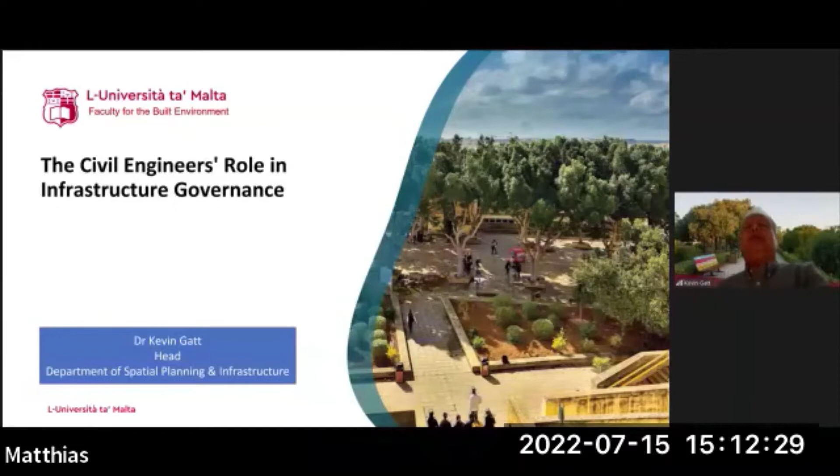I say this simply because the motivation or the inspiration which has underpinned this presentation comes from my pro bono role as a member of the qualifications panel of the Chartered Institute of Water and Environmental Management of the UK, which awards chartered status to professionals wishing to exercise the engineering profession.

One of the things that struck me most is to what extent have we not considered the societal impact of the engineer. Because if we look at the learning outcomes of the AHEP, which governs what an individual should have in order to achieve charter status, one particular section is precisely the engineer and society. It says that engineering activity can have a significant societal impact.

And on this, I don't think we should have any doubt. Engineers must operate in a responsible and ethical manner, recognizing the importance of diversity, and help ensure that the benefits of innovation and progress are shared equitably, and do not compromise the natural environment or deplete natural resources to the detriment of future generations.

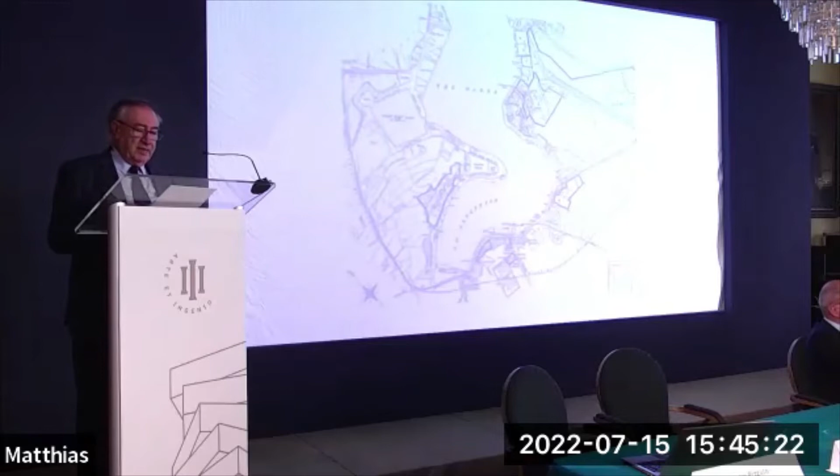Maritime developments in Malta have been evident throughout history, ever since the Roman harbor at Marsa. The Romans engineered a seamless infrastructure below and around the Jesuits' Hill, including berths and warehouses. The Knights of St. John, in turn, developed ingenious maritime logistics and galley facilities, mainly in the south side of the Grand Harbor.

Later came the British civil engineers, who, together with leading Maltese representatives, had a great vision. Together, they developed a new commercial port at Marsa and transformed the French Creek into a world-class naval base.

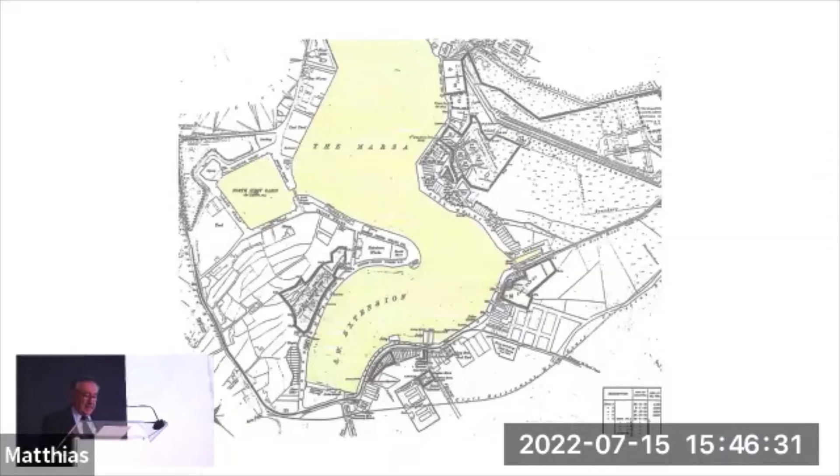Their technical skills, their analytical studies of the Maltese waters, their geotechnical evaluation at seabed level, their construction logistics and plant, and their distinction between planning the commercial port as distinct from the naval engineering base were fundamental in giving the Maltese harbors stature and dedicated usage.

Following independence from the British, the 50 years that followed saw Malta consolidate its harbors by following their original British zonal allocation. However, these developments became peppered with yacht marinas springing up here and there according to commercial convenience.

It was during these last 50 years that one has to recognize the successful development of the Marsaxlokk transshipment freeport, spot on where Lord Strickland had envisaged it in the 1930s. The freeport has brought sustainable economic activity of international standing.

One thing is comforting throughout history. Maltese artisans, civil engineers, and technicians work together with their foreign counterparts to produce sound maritime infrastructure. Thus, the challenge beckons the Maltese civil engineers to continue to discharge their future maritime profession with diligence and creativity.

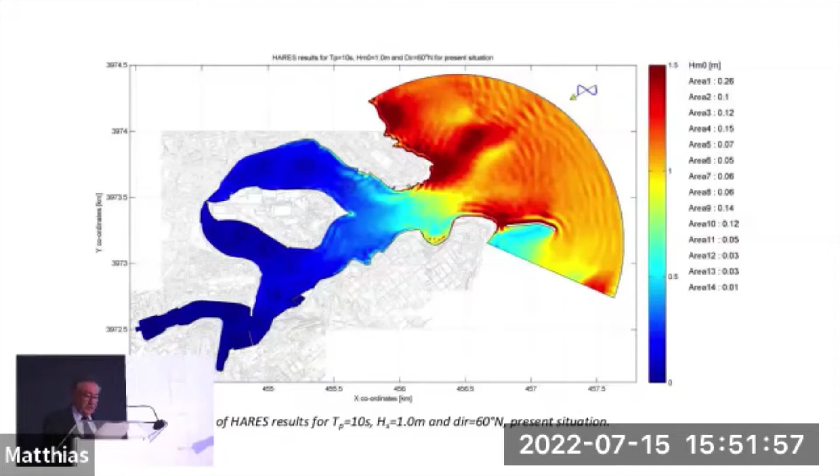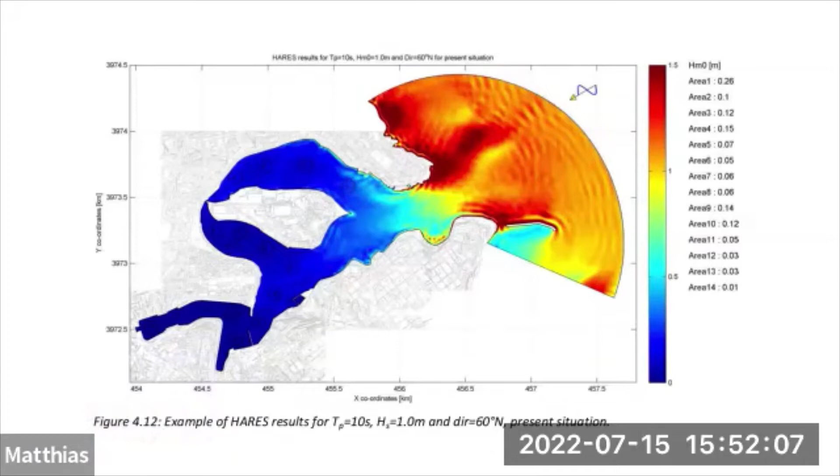Another major issue that the maritime engineer will be addressing in the future is nature itself. History has shown that whatever is man-made has to be respectful of nature. The builders of the Marsa Roman port 2,000 years ago seemed oblivious to the siltation and flooding in low-lying marshlands. Archaeological research has given light to what was justly attributed to distant history. How will the future maritime civil engineer plan his design criteria so as to ensure durability of the maritime infrastructure?

Luckily, science and technology today has built up a marine wave hindcast that civil engineers need to be conversant with when planning and designing future development. Nature is being monitored because of climate change, and extrapolation of records assist the civil engineer in setting long-term design criteria for marine structures. In fact, design offshore wave height from hindcast data gathered in the last 50 years and reconciled with more recent satellite data show surface wave heights varying from 6 to 8 meters, depending on the direction of the storm. Combined wind wave data show gust recordings of 40 meters per second for a duration up to 10 seconds, which then leads us to prediction of rise in sea level due to climate change.

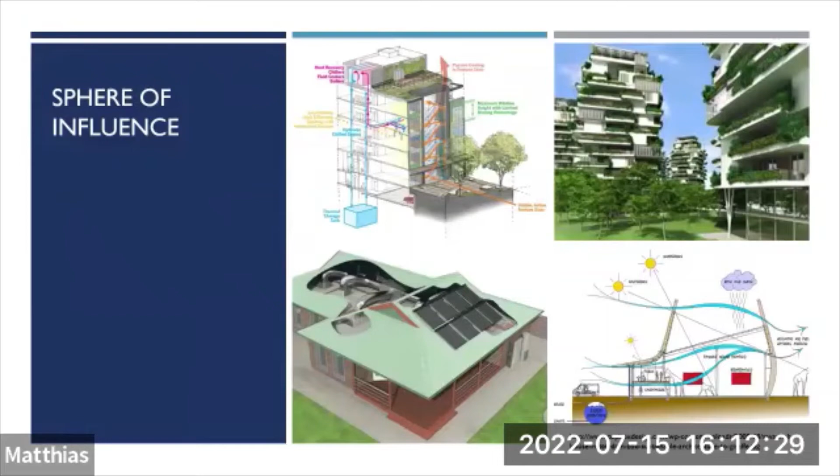Our spheres of influence, how do we make those changes? We all know what we need to do. We need to rethink our strategic land use. Malta, being an island limited in space and highly developed, land use is essential. Efficiency of space is essential. What we build, where we build it, is of the utmost importance.

Passive systems and water harvesting. Water, in order to fight against desertification, is very important. When we do have these extreme storms, we need to collect as much water as we can so we can reuse it, instead of, from the high developments we have, allowing the little water we get to run into wastewater from the roads and whatnot.

Concepts and solutions can fall into two categories: tweaks and innovation. Tweaks: adding insulation, low flow toilets, switching to energy saving lights. Innovation: rethinking the way we design landscapes, instead of just making more efficient equipment or vehicles. We need to rethink what we do, and we need to do it well again.

These concepts have the potential to relieve environmental concerns and improve our lives, and they carry an architectural bonus: more interesting and creative design opportunities.

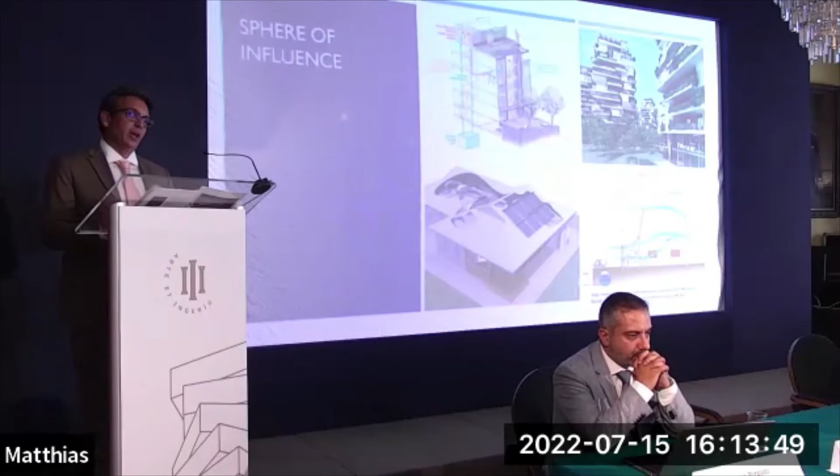I'd like to start off by going through several projects that we're doing at the ministry in Gozo. I'm starting off with the smaller projects, a group of 3 projects that I'd like to demonstrate that there's an opportunity in every corner, in every node, that can make our environment a better, more sustainable place.

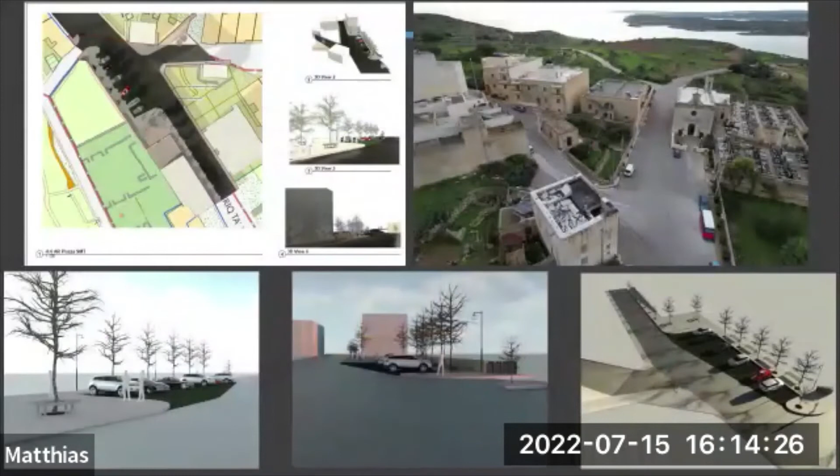The first one is in Qala, Gozo. It's a very heavily trafficked area that leads to one of the most popular beaches in Gozo. Currently, as you can see in the photo farthest from me, it's a traffic area in front of a church that provides no organization whatsoever. It provides some parking, but there's no defined spaces where you can park.

One of the proposals we have is by simply reorganizing so that the vehicular traffic flows know where they need to go, and by the leftover space, we provide grass paving that can filter water into reservoirs, and also in doing so, organize the parking spaces and create a small little piazza in front of the church, which is to be restored in the very near future.

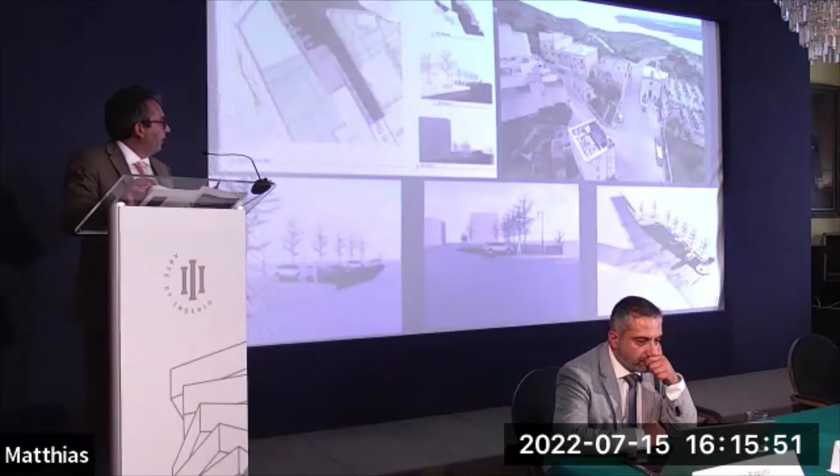This area has the potential to catch water from various elevated spaces, which otherwise would rush into the surrounding areas. By catching this water, we can reuse it in our fields and recycle it for the vegetation to bring up the area around the church.

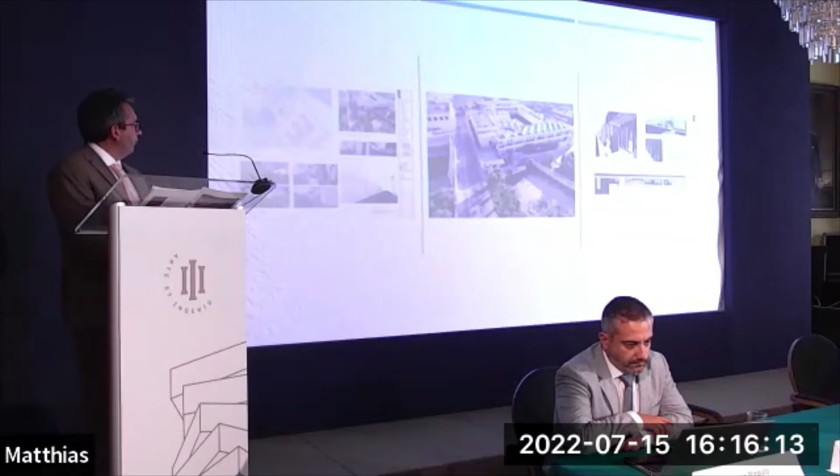Another urban greening project, this time in Ghajnsielem. This is in front of the school of Ghajnsielem, and it is in the very near future to be awarded funding by Ambjent Malta. It received very good marks.

It's a small project. We're removing the cables from overhead, putting them under the road. Most importantly, we're taking down what is now a barrier wall which acts as the entrance to the school, creating an unusable space in front of it. So our project proposes to take down this wall and create a green urban space.

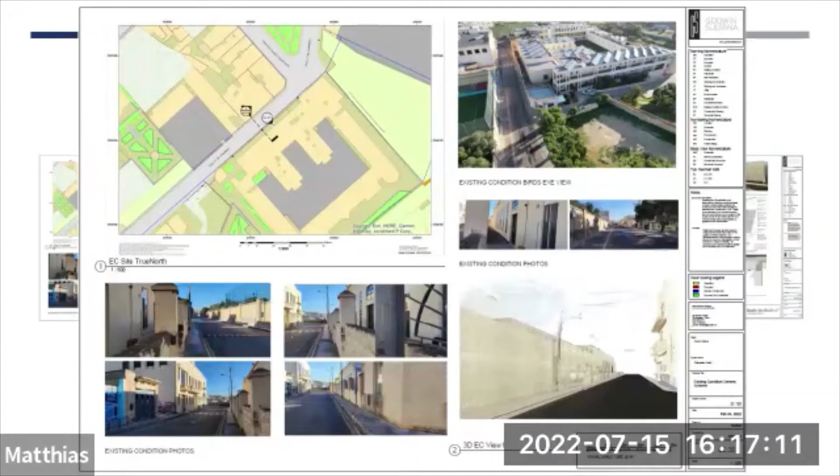Again, we have a reservoir nearby that we can use. We're providing canopies, a green canopy to shelter not only parents who are picking up or dropping off their kids at school, but also providing vegetation on the canopy. Small little acts that can be done that are vital in creating a better environment.

You can see the corridor, which is bland. This is also the entrance to the village of Ghajnsielem, already a very interesting green corridor before you enter this space. Once you enter the corridor of the school, it gets a bit dry and drab with unusable space.

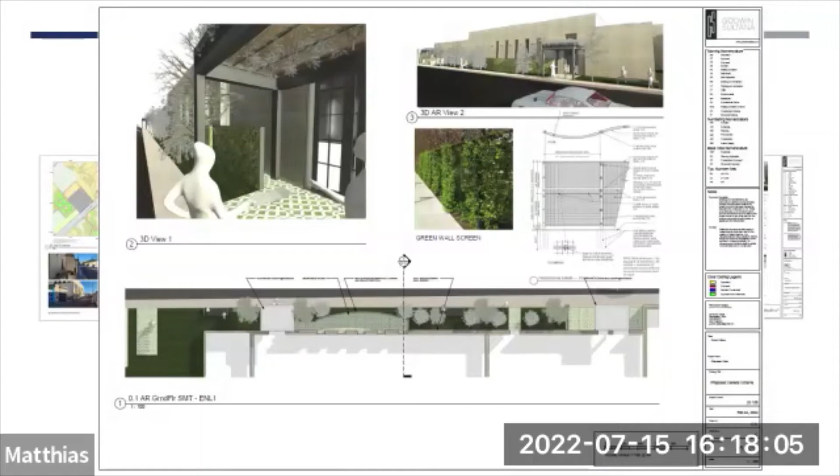Again, these are the urban spaces we're updating. We're providing more open space for the public to wait for their children or just enjoy the area. Some benches, green fencing that will allow the necessary privacy towards some of the classrooms of the school, as well as the auditoriums.

And then we get into a slightly larger project that acts as a catchment. This area is right before the valley that leads to Mgarr Harbor. This was subject to very high flooding in September of last year because one of the stormwater culverts got clogged, and there was flooding of all the nearby residences.

This project, which we have approved funding for, proposes to reinstate the stormwater catchment by adding green paving that will filter the water and allow us to collect clean water into new reservoirs. So there's an aspect of water harvesting, and from this we'll be able to circulate the water and increase the amount of soft vegetation.

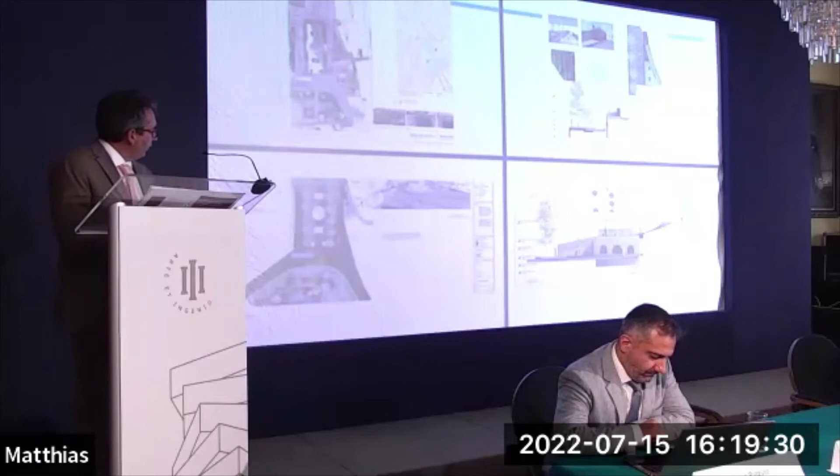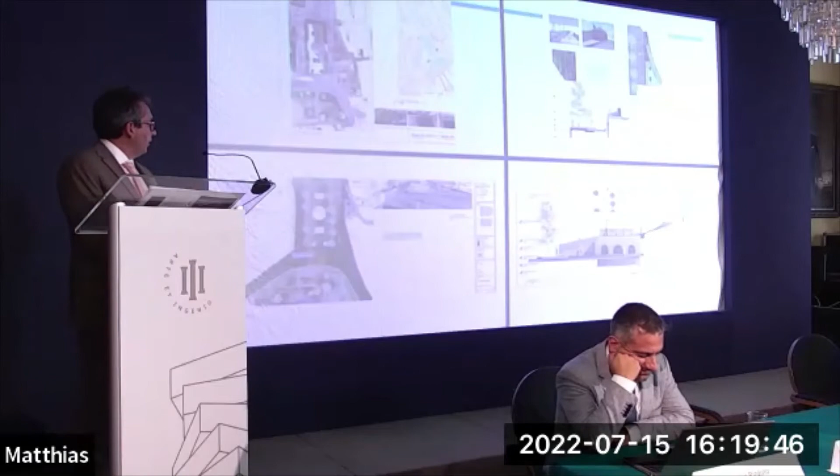Also part of this system is the playing field in Ghajnsielem, the lower area, where we are drastically increasing the amount of soft landscaping. It's a playing field where we're installing better play equipment and creating more environmentally friendly spaces, while also providing public amenities that are currently lacking in the area, creating better spaces for the community.

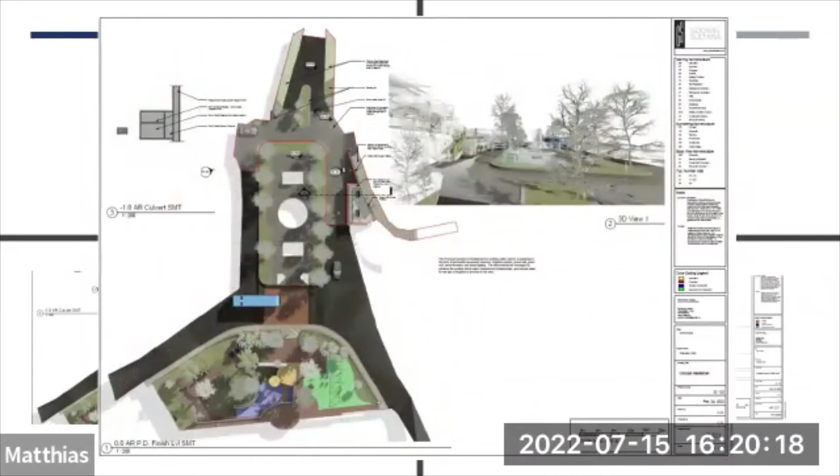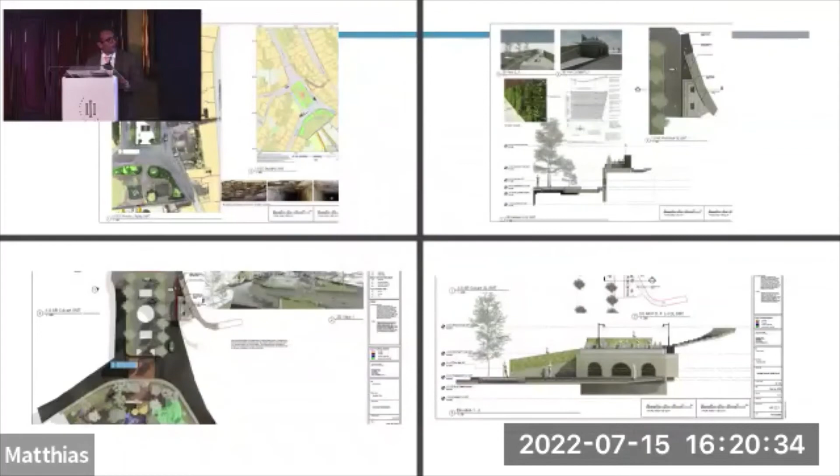Some better description of the green spaces added around the area, with vegetation at various levels and aspects from the beginning to the end of the playing field, where water will be collected before it runs into the valley system and then off into the Mġarr Harbour.

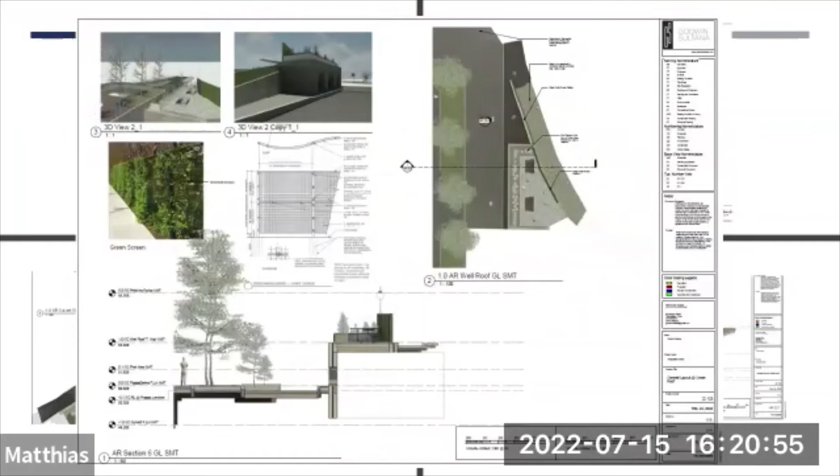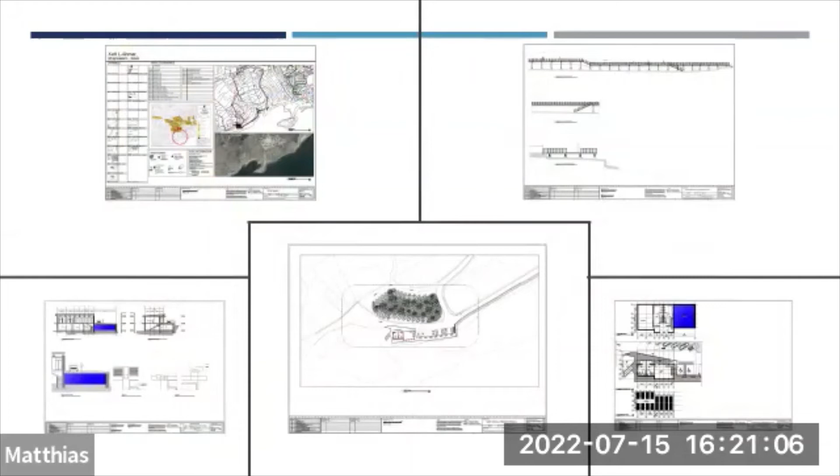A small project at Xatt l-Aħmar, Red Bay in Gozo, just under the Chambray fortifications. This area is very important because it's strategically located, with a diving site and 2 scuttled vessels, heavily visited by scuba divers, and vital in our scuba diving master plan for the island of Gozo.

This project seeks to create a small kiosk building where divers can come, change, rest their tanks, take showers, and do what they need before going into the sea. It will also provide a point of first aid if necessary, since unfortunately there have been various injuries among divers, swimmers, and bathers who frequent the area.

These structures, although they cater to our needs, can be done strategically and uniquely, providing solar panels for off-the-grid energy and power, and a reservoir to harvest as much water as possible to increase the amount of soft vegetation in the area.

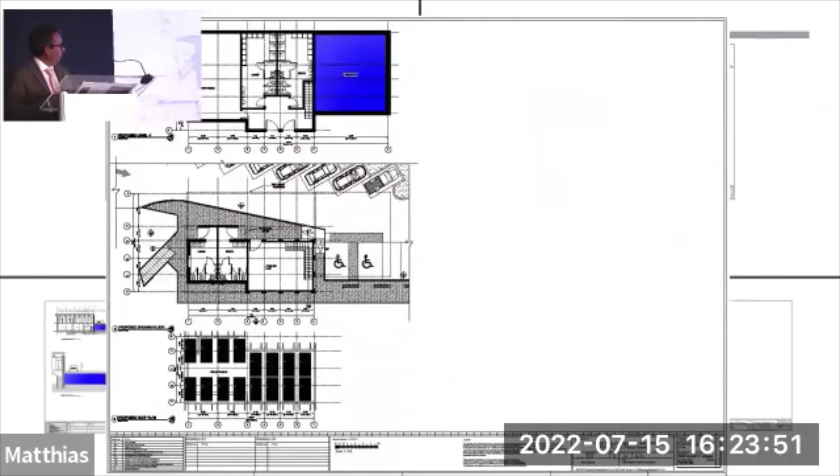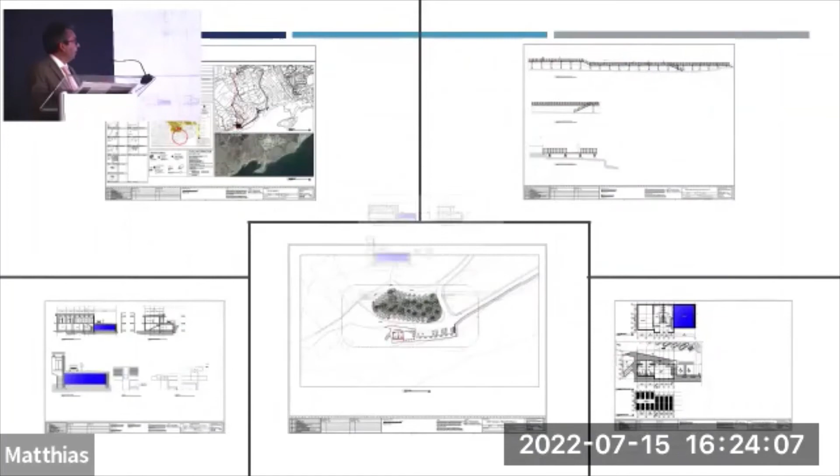Some more slides depicting the outposts, the solar panels, the small rooms providing spaces for the required amenities, reservoirs, and the types of design detailing we're striving for in all the structures, spaces, and infrastructure we're creating in Gozo at the moment.

The Decarbonizing Gozo project, the Green Park and Ride. This project was awarded funding, driven by EU policies introduced for reducing greenhouse gas emissions and other transport externalities, primarily through low emission vehicles, including the 6 buses the minister mentioned previously, switching towards low emissions, alternative energy for transport, and efficiency of the transport system.

This fleet shall be used to transport commuters between the Park and Ride facility and the Mġarr passenger terminal, operating on a demand basis through a mobile app where users reserve seats beforehand. MGOZO plans to provide this service from several strategic points to encourage this mode of transport locally. Terminals holding around 25 electric bicycles shall be in Victoria, Marsalforn, Xlendi, and the new Park and Ride facility. The Park and Ride facility in Ta' Xħajma, near the racecourse in Gozo, is the first of a pilot project we are developing.

This project, catering for EU policies, has been awarded EU funds as part of the Decarbonizing Gozo project and the vision of EcoGozo, which has been working tirelessly for sustainable design over the last few years.

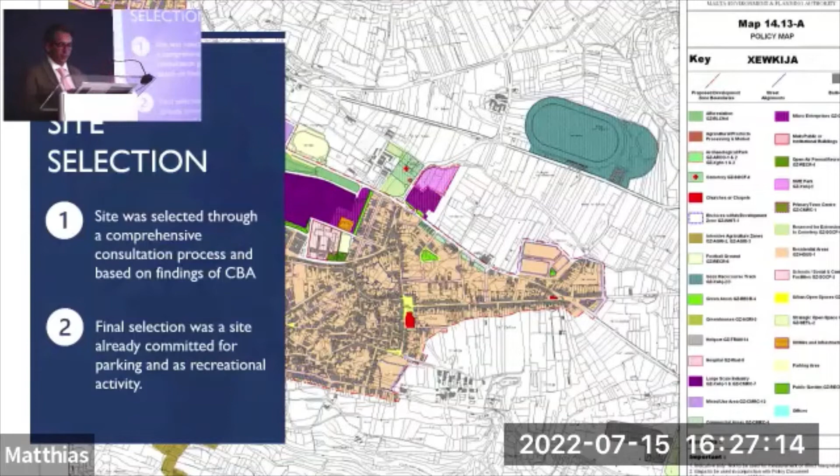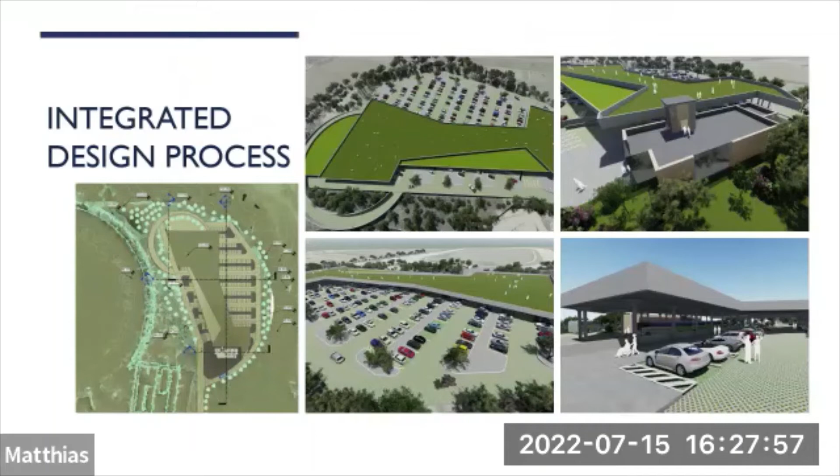The existing site was a brown site. Works are currently underway, excavating the large mound of construction debris dumped on the site when the racecourse was built. We are digging the site out to road levels, matching the horse racecourse, where we will provide our Park and Ride project catering for electric buses and various e-transportation modes, as well as creating a large recreational space at the upper levels.

This large recreational space caters for a need for families and sports in Gozo, where they can enjoy their day, which is a necessity that is limited. Although Gozo is considered the greener island, the places where you can go and enjoy these types of activities are very limited.

Cars can come, park under the roof deck in the shade, and then take a shuttle with the electric bus towards Mgarr, where parking spaces are non-existent, and catch the ferries or the fast ferries now available. So public transportation is key. The location of this project is also relevant to a second part of this project, which we'll see in future slides.

It makes sense because whoever comes to use the sports facilities, which I'll present shortly, can park here, so everything is contained. Instead of creating a parking space separately and using land frivolously, we're trying to create strategic master plans where all land use is used efficiently.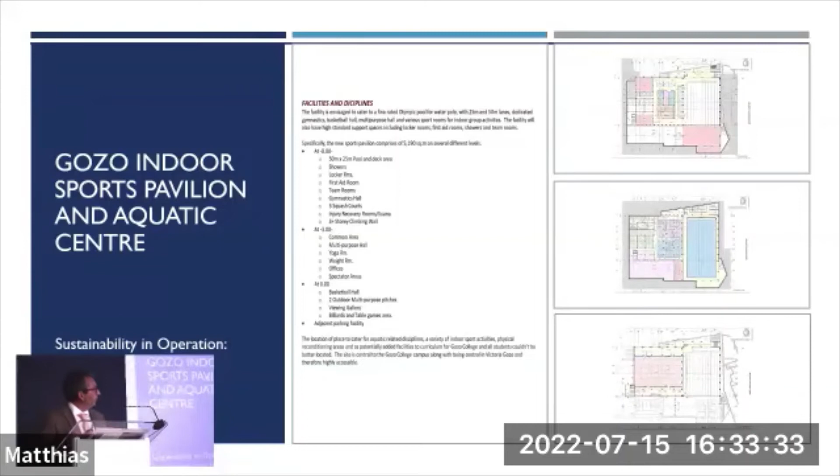This is the site of what was previously, or still is, the sports complex. We've rationalized the spaces to drastically improve the facilities we're providing. In design, there are many elements and engineers from all levels involved to create what's usually known as a high energy building, while mitigating as much energy use as possible.

These are the types of spaces provided, shown in visuals from the original concept. We're creating a 50-meter pool, with different volumes including basketball courts, a new indoor multi-use space, and a very large gymnastics area. These very large volumes, which are hard to control in regards to heat flow, are compartmentalized to manage these flows and make the best use of the energy required to run them.

The structural elements complement egress and M&E systems while creating functionality and storage of equipment, and a visual connection between existing and new spaces. One of the most important things in passive design structures is insulation. One way we dealt with this, and made the best use of spaces, is by placing large amounts of space underground.

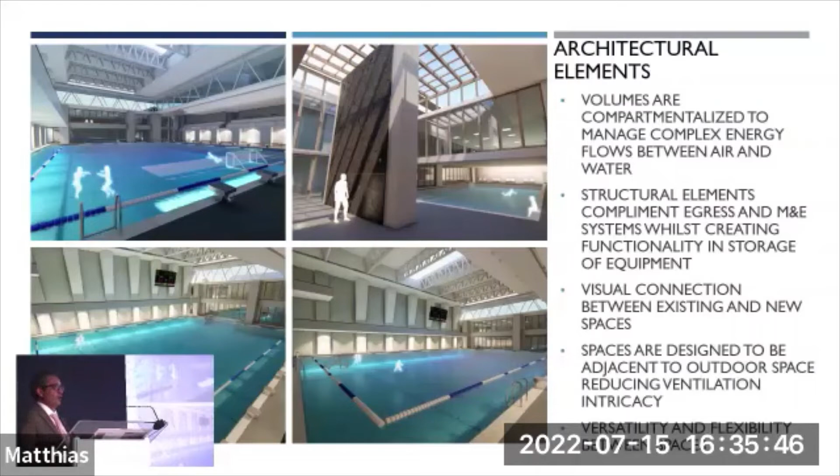Although this can create very dark areas if not done well, we managed to introduce sunlight directly into the spaces which require it. This passive approach, by including sunlight, also allows us to introduce ventilation. So even though it's quite a high energy use structure, we've managed to create passive systems in ventilation, lighting, and a highly thorough insulation system throughout. Glazing is also involved, which I'll cover in another slide.

Glazing is on the north facing wall, which allows us to bring in light without increasing the energy flows to levels that we don't want them to.

These are more developed throughout the works. These are more developed renderings.

I must give a shout out in terms of the design flows. In creating these very layered, very designed structured buildings, systems, civil works and whatnot, it is imperative that the communication between the engineers and decision makers is important. We have invested heavily - I consider it part of a design team. We invested heavily in certain systems, Revit, AutoCAD, obviously that BIM management. BIM management is essential in doing these structures in order that you can not only come up with the best designs, but you can also monitor.

So what happens when we hand over this building, hopefully in the near future, to the person who's actually operating it? It's important that we hand over not only the building, but also how to run it, what was envisaged, and how to upgrade it, and to see where maybe we're not reaching the goals and how that can be amended. That can best be done by recording, monitoring, and communicating well the design, the design integrity, and all the design flows by using these BIM systems.

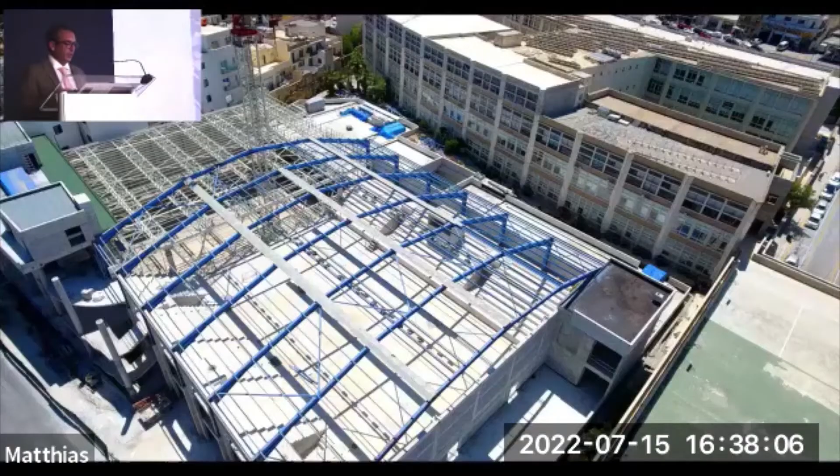We have a small video, taken this week, to see just where exactly we're at. Location, again, location is key. The building is located at the existing sports complex, and the proposal is located... I think I crashed the system somehow.

This was the first of the three sports projects I'd like to go into, but it's probably the most complex and the farthest along in the system. The other two, the shooting range and the park and ride facility, are going to see some of the same layering and detailing that we've presented here today. There are many more projects that we are well into, that we are using to get us to our goals for net zero.

These include, let me give a shout out again, the petting farm, which is creating more green spaces, more of a Central Park theme. Again, in every single sector affecting Gozo, we are instilling this ethos that I've talked about in detail that we are striving for as well. There are quite a lot of projects, more than I can explain here today, but if there are any questions, please feel free to contact us at the ministry and we'd love to go through them. Thank you for your attention.